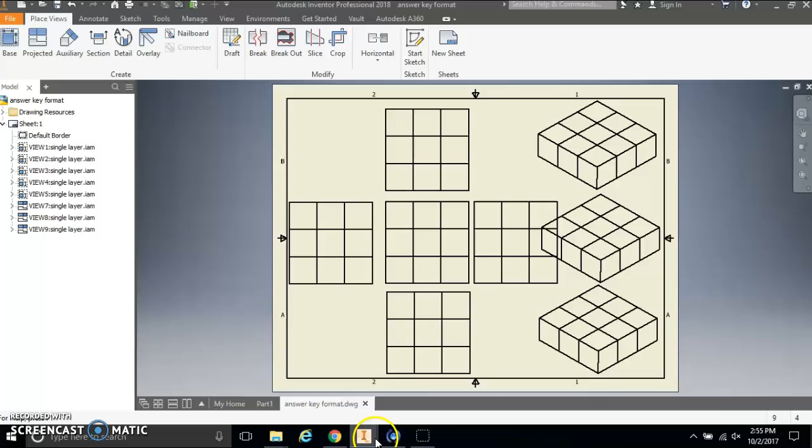Secondly, you need to make sure that you assemble all of your parts together. And this is the part that gets a little bit tricky. You need to have all your puzzle parts, like I've got my puzzle parts down here created, ready to go. And we have to open up a new file format. For those of you who have taken my class in 7th grade, this will be pretty easy. For those of you who are totally new, this is going to be your first experience in creating an assembly file. So we have to go up to File, and we need to create a new file.

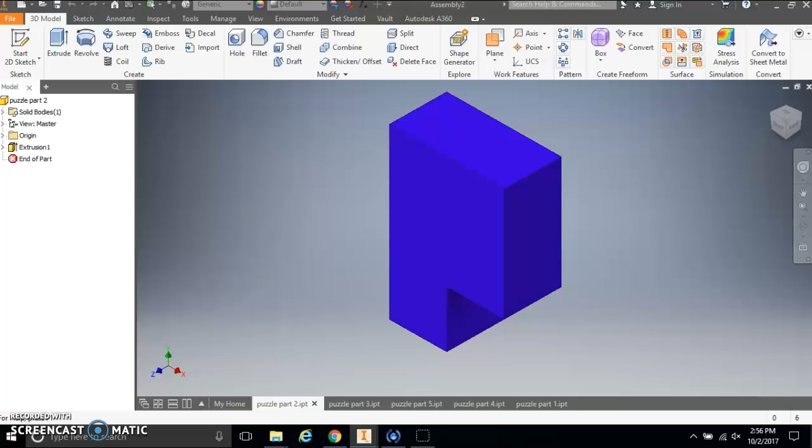This is what we're going to use right here, the standard.iam. Not the weld. We're not dealing with sheet metal, so we don't use that. We just use the standard.iam and create. So now, after it loads, we have to place all of our pieces into this file. There's a place button right here. You may have to click this little down arrow and go to place, because sometimes it automatically loads place from Content Center. That's not what we want.

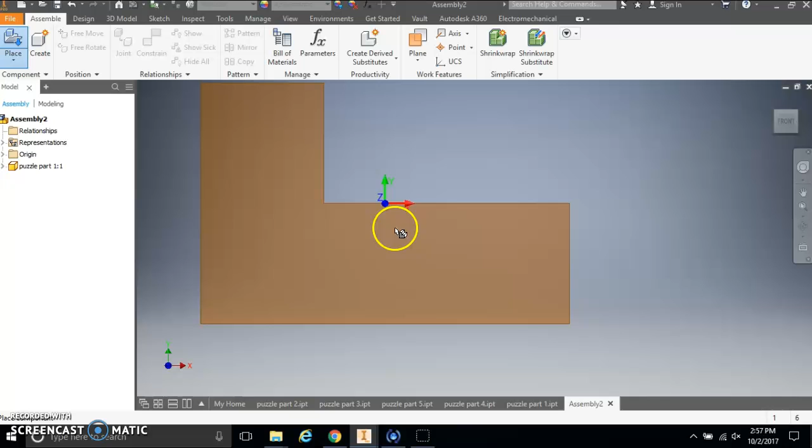So I will place, and I can see my puzzle cube parts. You may have to search for your files where they're at, but I'm going to just go ahead and put part 1 in here, click it in there. I'm going to zoom out. I'm going to stop there. I had to right click and press OK. I want to ground this piece so it does not move at all. This will be basically where I'm building everything off of. So if I right click that piece, I can go down here and click grounded. Now that one's grounded. It cannot move anywhere. If I try to move it around, it will not work.

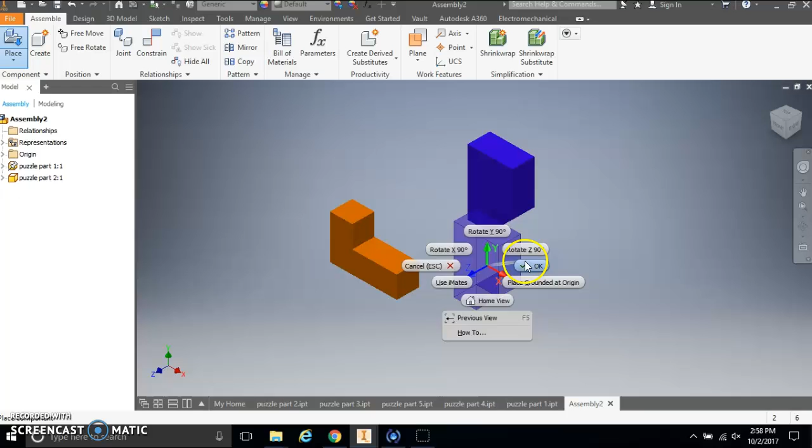Now let's put a second part in here and see what happens. Here's part 2. So right click, OK. Now this part right here, I can move this one around. It is ungrounded. This one, it's grounded. I can't move it at all. I'm not sure, I would have to look at my answer key for how these parts go together, but I will show you how to constrain all of our parts.

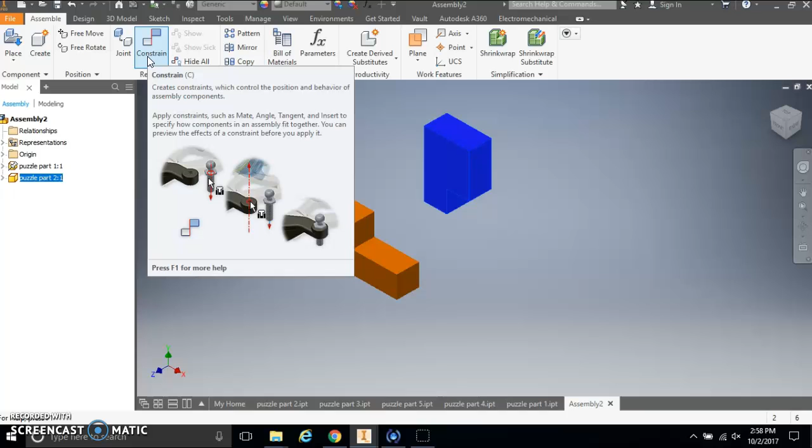There's a constrain tab up here, and this is going to take some trial and error. You will have to try it, delete it, start over. That is okay. That is normal. Do not get frustrated if it doesn't work the first time, second time, third time, fourth time. That is normal. So we'll go up to our constraint. There's 2 main ways, actually 3 main ways, that we can try to constrain things. The first is we'll look at different edges. I'm going to rotate this view around. Maybe I need this edge right here.

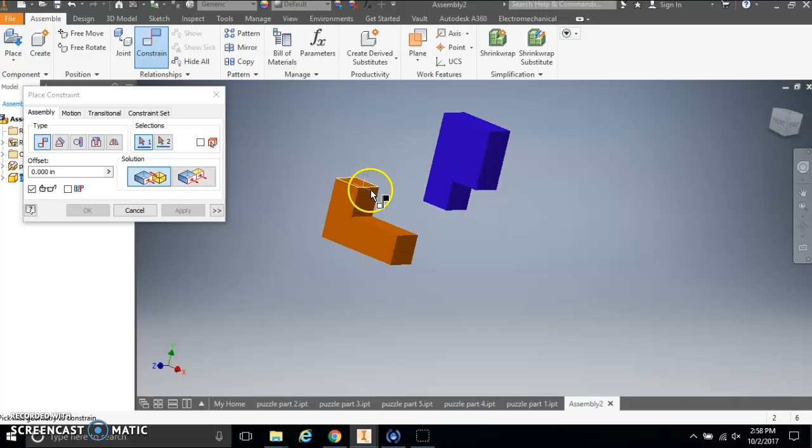We'll go with this one. This edge right here to be lined up with this inner corner right there. If I click that, it does this. Now that's not wrong. Let's click apply.

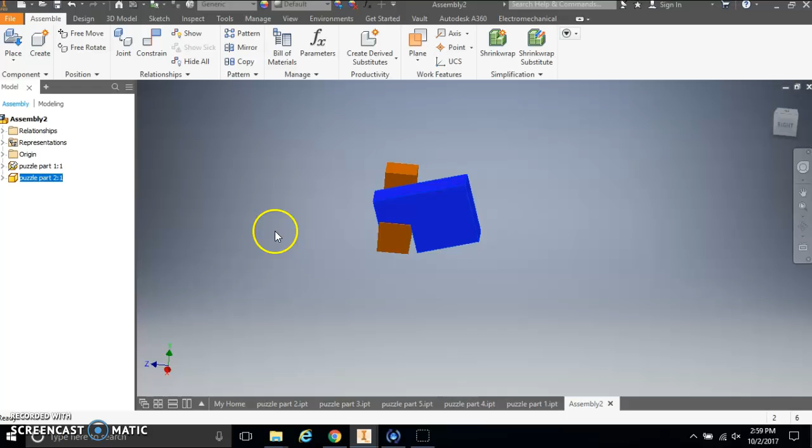And remember how I said this orange one's not going to move around. I can move this one around though. So now I need to constrain a few other things. Rotate it around again. I'll show you how you can use the edge again. I'll click this button, this little edge right there. Click that. Now I can click that edge, and it locks those in place together.

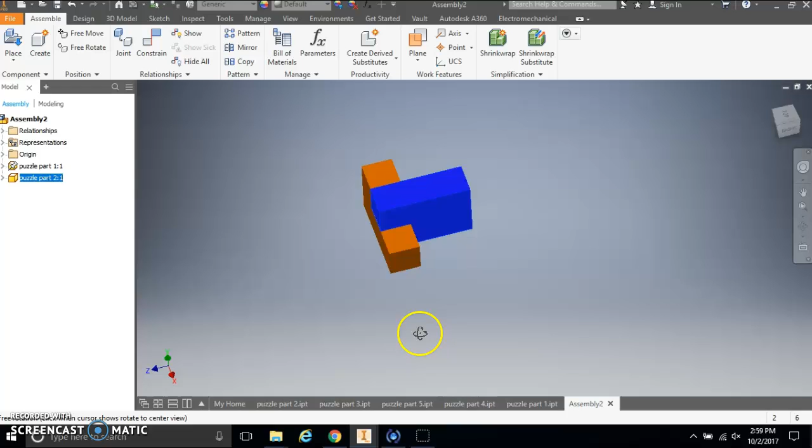I'll click apply. And then I'll try to shake it around, and it's not going anywhere because those edges are locked together. And these 2 pieces are locked. I can't do anything else with them. So that's perfect. Now I'll show you a second way. So that was using the edges.

Let me add a new part. And again, this is not how I'm assembling my pieces. I'm just showing you how to constrain objects. Now this piece, we'll say, needs to fit in here. Now I can use constrain and just the general faces of objects.

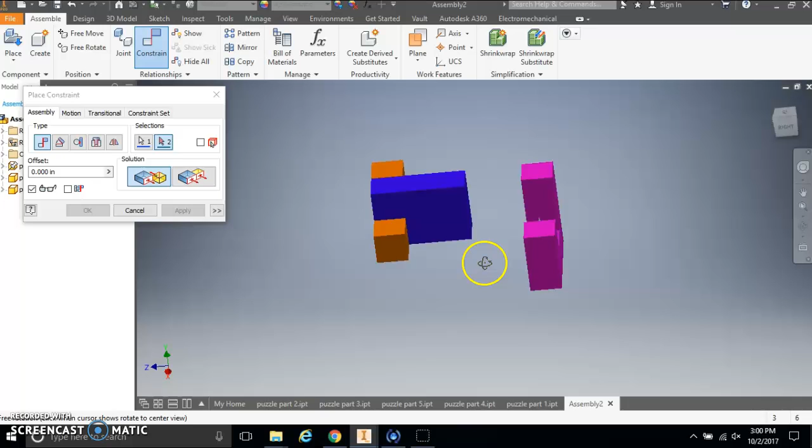So click that, and maybe I need that to go on this part. So I click that there. Okay, that's fine. That works out pretty good. It's still not perfect, so I'm gonna just apply, and the only one that should move is this.

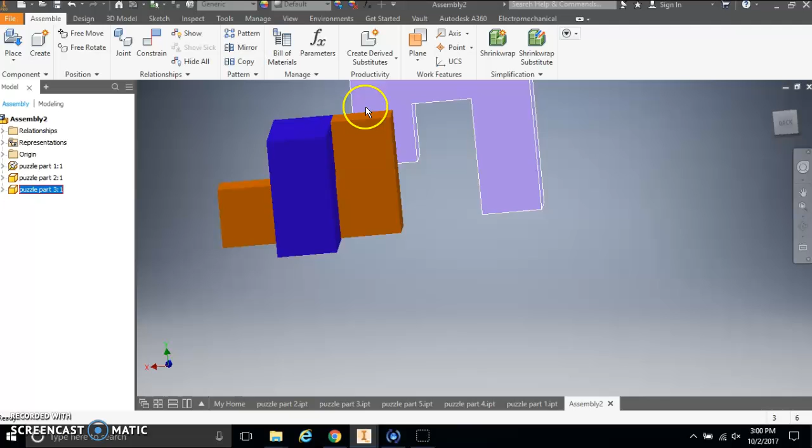So now if I look at this, I need this little gap here to be on that orange piece. I'm going to constrain this piece right now. See it right there? To this piece. Nice, look at that. That worked pretty good.

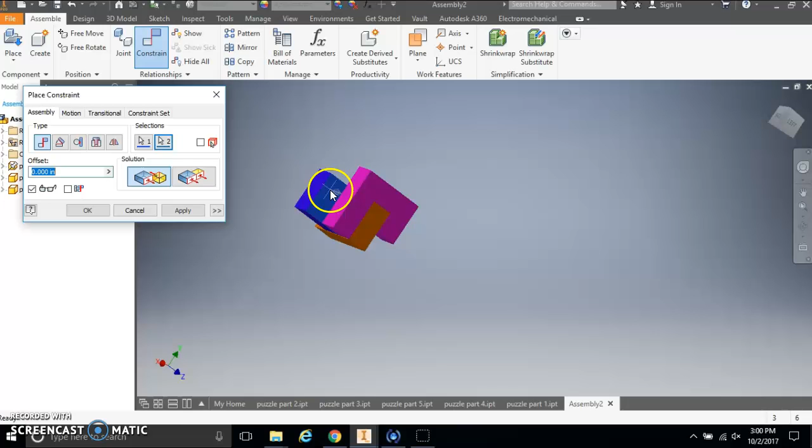And now I could constrain this face right here to this face, and it's locked in that position. Let's apply that, see if I can move it around if there's anything else I need to do. Nope. Those are locked together and it works.

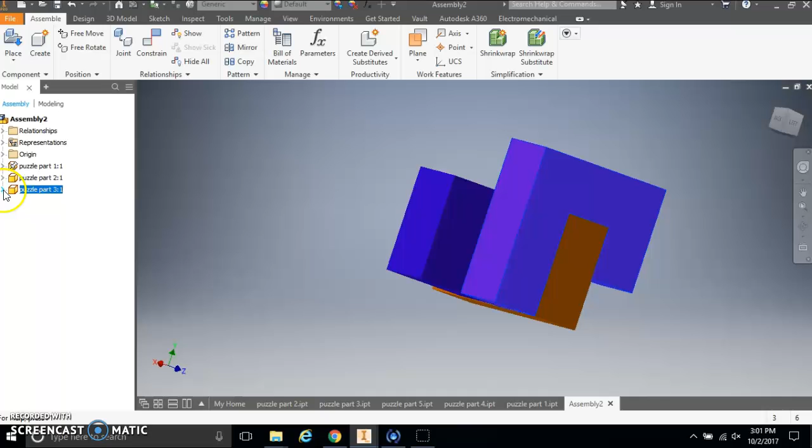Now, say I didn't like that, or it didn't work out right, or I needed this to actually move somewhere different. I can go over here to my model browser and I can select it, and I can right click all of these different mate constraints that we just did, delete them. Now I can move that around.

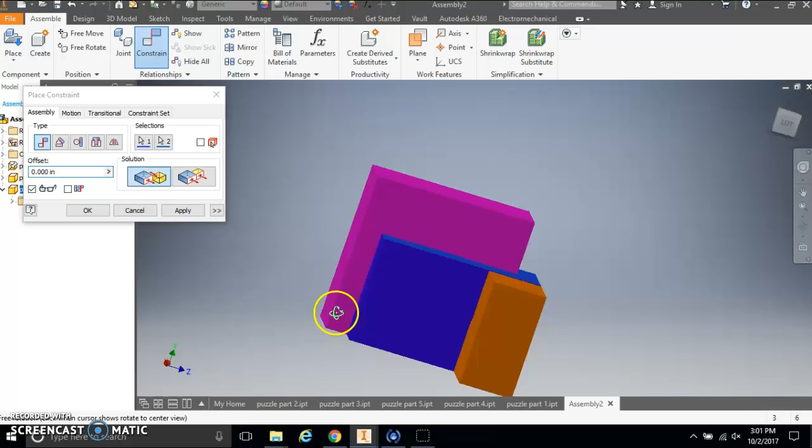The last way I was going to show you is, let's see, let me make sure, get these on here, is going to be a flush constraint. So I locked that on the top there, but that's not quite right.

So say I wanted to, see there's a flush constraint right here, I'm going to click that, make this flush with this end. So see how I can do that? Both of these are in line, they're flush, they're working with each other. I'm going to click apply.

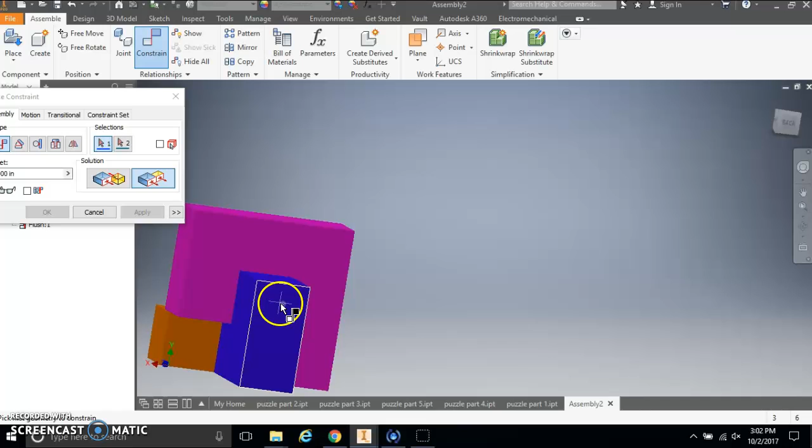And maybe I also need this flush with this. So see how it moved it over? How those arrows are pointing in the same direction? And you can see those arrows are pointing in the same direction. That works. Click apply. Let's see what we got. Try to move it around.

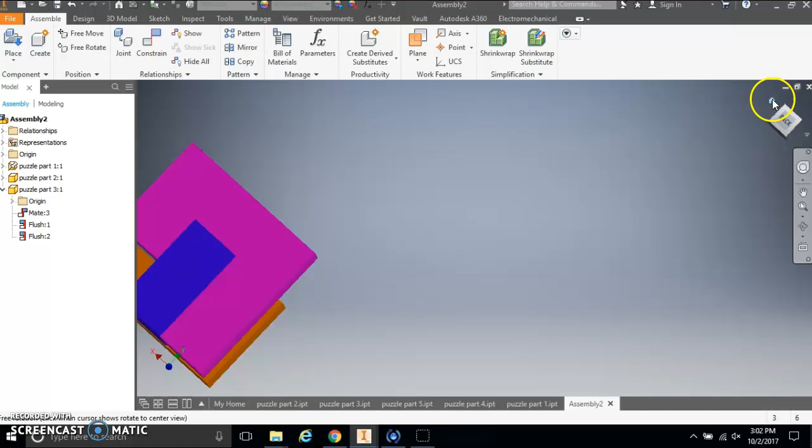Nope. We're locked in. So if I go back here, I can see that I've shown you how to constrain things using the edges of objects. So say like that edge or these edges. The face of objects using the mate constraint right here, where the arrows are pointing not in the same direction, towards each other. And then we've shown the flush constraint right there, which is very useful too.

So you're going to have to play around with these and assemble all of your cube. Now, it's important that you have your scoring rubric in front of you, or not your scoring rubric, but your answer key that you created for your puzzle cube. That's going to make everything a lot easier.

Good luck working on this, and there's many people who have taken my 7th grade class that could offer some help. Mr. Frank is not the keeper of all knowledge. They can also help you with this.

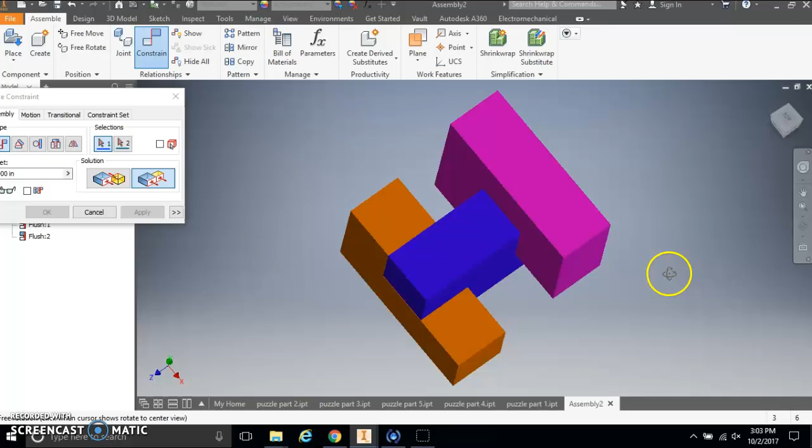All right, have fun and learn how to use this computer program, because you will be using this in your high school classes if you take Intro to Engineering and Design, or Principles of Engineering, or possibly even drafting. So this program that we're learning how to utilize right now and the way it operates does not go away.

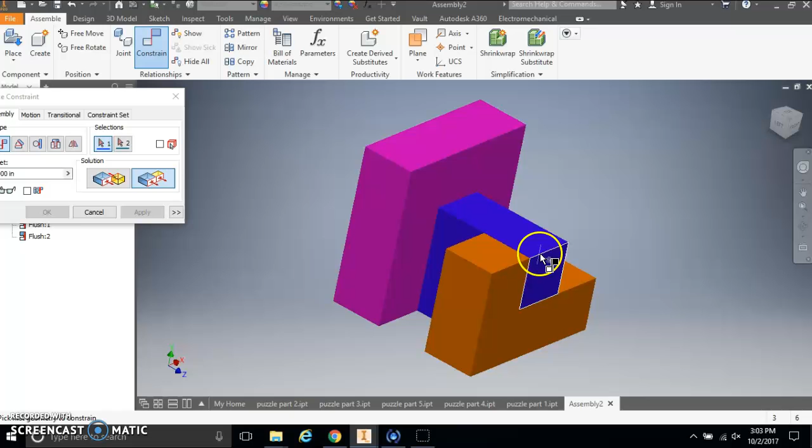There's even other CAD programs that operate. They might not be the same, but they have similar tendencies. So it is really good to understand a 3D modeling program, and this gives us a good basic understanding of those types of programs. So have fun.